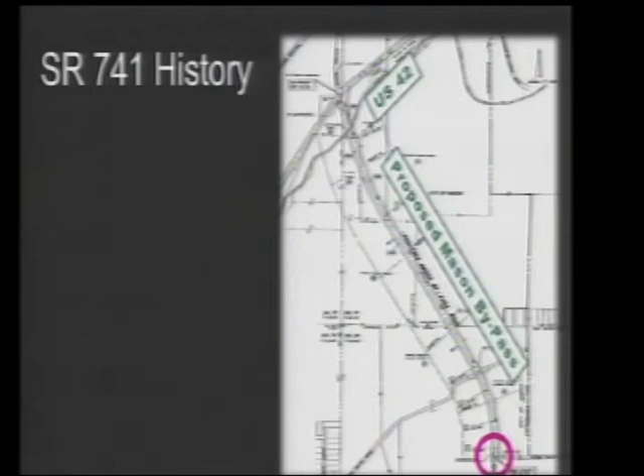So first, this area of 741 is also referred to as the Mason Bypass, which was originally built to connect 42 with Kings Mills Road. Circled in red at the bottom there is our intersection. In about 1971, Mason hit 5,000 population and became a city. In 1972, when Kings Island opened, this part of 741 hadn't even begun construction yet. So in 1973, it started. This allowed traffic from the 42 area, rather than go through downtown to get to the newly constructed I-71, to now go through the Mason Bypass and more easily get to the new highway.

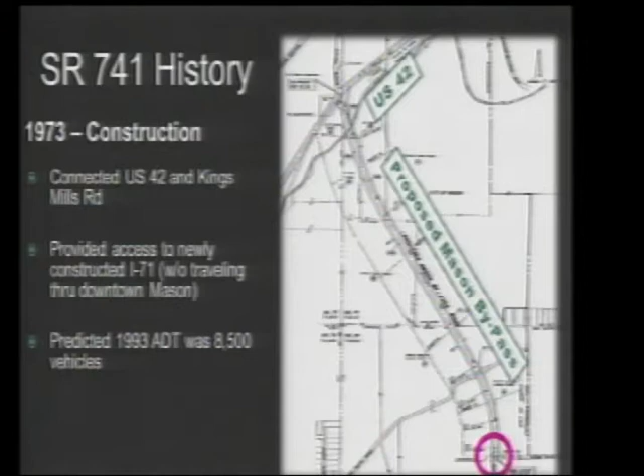I just want to mention no improvements were done in the Parkside Drive area from there to I-71. Many of you remember Kings Mills Road was just a two-lane road, really hilly, before it was widened with the next project. ODOT requires us to look out 20 years when we do projects like this. So back in 1973, the '93 projected traffic was about 8,500 vehicles, and in 1996 we were over 13,000 vehicles, so we well exceeded the projected traffic counts.

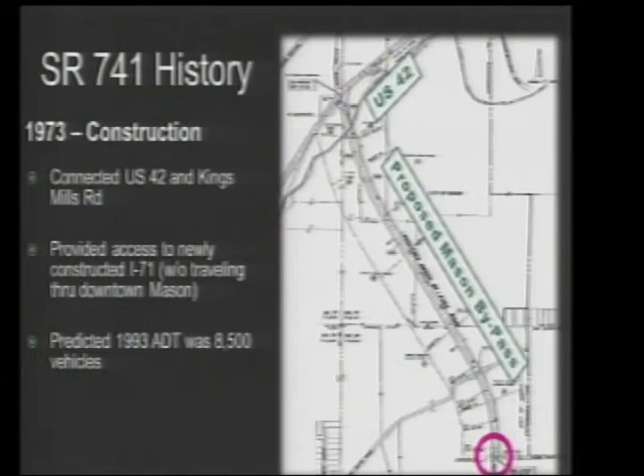The next project in this corridor, in 1997, we began construction of the widening between Parkside Drive and I-71, and again our intersection is shown there in red. With this project, we also added a traffic signal at the intersection. Prior to this, it was just a four-way stop and was also the site of a lot of backups. In this project, our 20-year projected counts for 2016 were about 18,000 vehicles, and today we're seeing counts of over 20,000 vehicles a day. So again, we're exceeding the projected traffic counts. So why is this important? The 741 corridor was really built to allow traffic to get to and from the highway from 42 and the 741 corridor north of Mason.

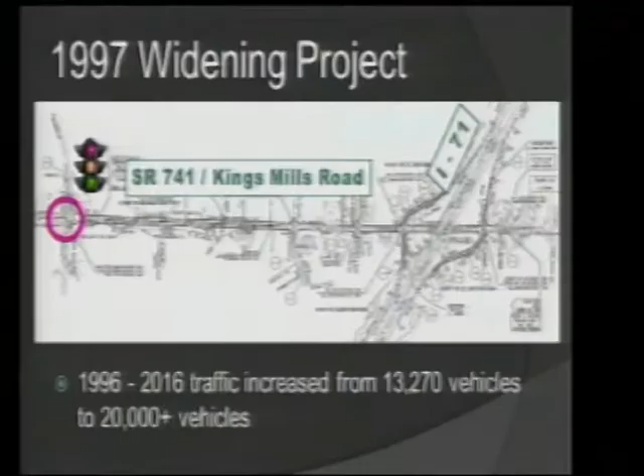So current issues at this intersection: we have backups in the southbound direction in the AM, also westbound in the PM, significant peak hour backups. We also have a lot of crashes, about 46 crashes in the last 3 years, and half of those were rear-end crashes. That is a typical crash that you would see at a congested intersection where traffic is backing up due to the signal and where the volume of traffic exceeds what the intersection can handle. We also had an uptick in crashes in 2015. We had 20 crashes alone last year. This year we've already had 15, and 11 of those were rear-end crashes, and that was just through September.

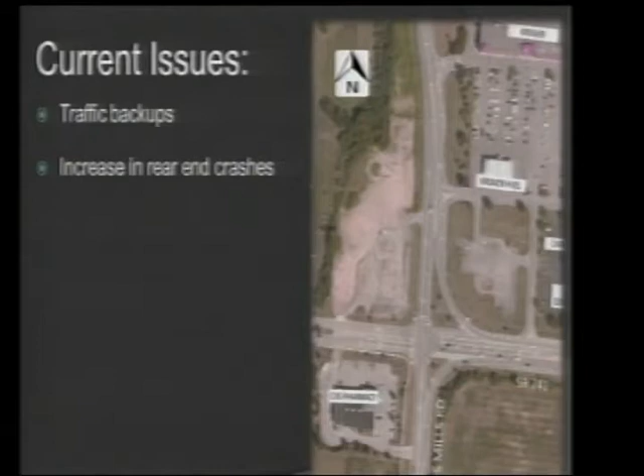We also have the Kroger Weave, and what we mean by that is traffic that's going through the intersection, either making a left turn off Parkside or going north on Kings Mills Road, has to merge with the traffic that's going through the westbound right turn movement, and the traffic that's trying to reach Kroger has to weave through that continuous line of traffic. That's what we mean when we talk about the Kroger weave on future slides.

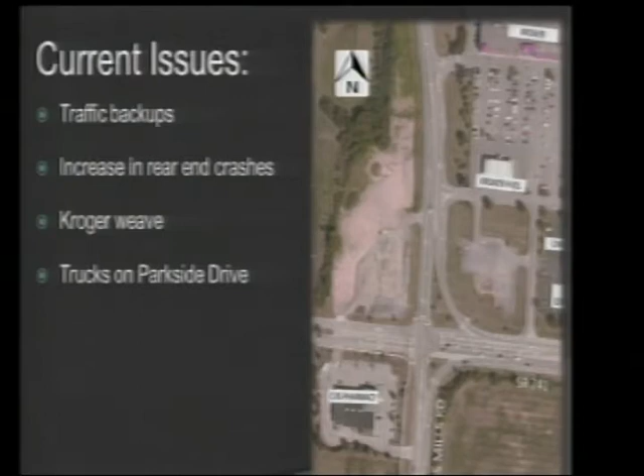We also have an issue with trucks going through Parkside Drive. We have it signed out there. We also have it on the pavement, no through trucks, because trucks think that to continue on 741, they go through the intersection rather than making that right turn, and many of them don't realize that it's a right turn to stay on 741.

So what's happening is traffic's finding alternate routes. We have more traffic using Hanover Drive, Parkside, Kings Mills Road to access the intersection because of the backups, especially in the southbound direction. We have increasing daily traffic from areas north of the city. We have the Otterbein community, the Racino, Ambleside, Carmel, which I'll go over in the next slide, as well as some area attractions. We get traffic peaks after the AM peak. We get another peak for Kings Island and the beach, as well as Great Wolf Lodge and the tennis tournament and volleyball tournaments.

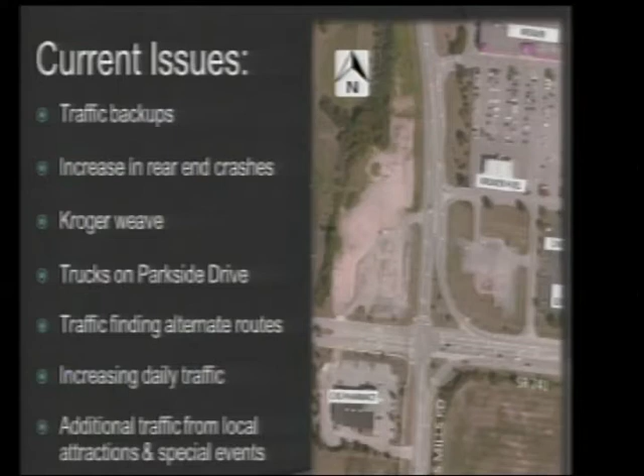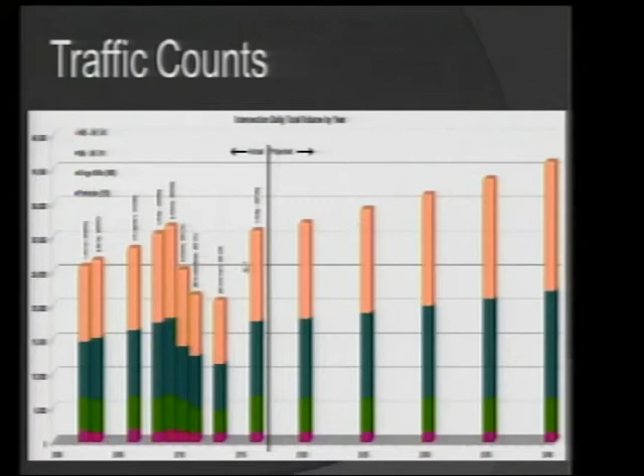So again, ODOT's requiring us to do projected counts 20 years out. We're using a 1.5% growth factor out to 2040 to get our projections that we've done all of our traffic modeling on. So as I was saying, there's potential growth to justify these numbers. We have over 500 acres of industrial and office ground within the city limits.

We also have the Ambleside development that's just beginning to build houses here. We have the Crooked Tree Preserve subdivision with 200 plus houses there. We're continuing to build out the Reserves of Carmel subdivision down here, as well as the Willowbrook subdivision. And that's just within the city of Mason.

We also have the Otterbein development, I understand, has 3,000 to 4,000 units possibly, and that's again a long-term plan, as well as the state is looking to sell about 1,000 acres of prison property for future development.

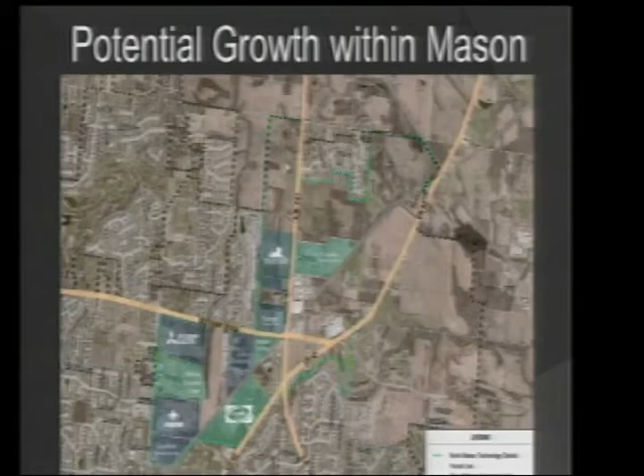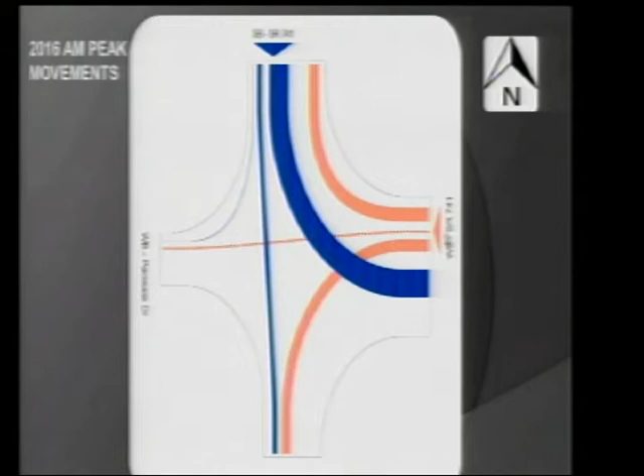If we add on to that the westbound movement of 741, you can see that it's fairly evenly distributed between the westbound right turn and westbound left turn movements. Again, this is westbound traffic approaching the intersection. If we add on the Kings Mills traffic, the majority of that traffic makes a right turn, also heading towards the highway.

And finally, Parkside Drive. So as you would expect, the major movements are 741 southbound and 741 westbound. Both the left turn and the right turn movements are really heavy. We expect the growth to occur. If you look back at the previous slide, you'll see that the Kings Mills traffic and Parkside traffic are pretty stable through all the counts that we've done.

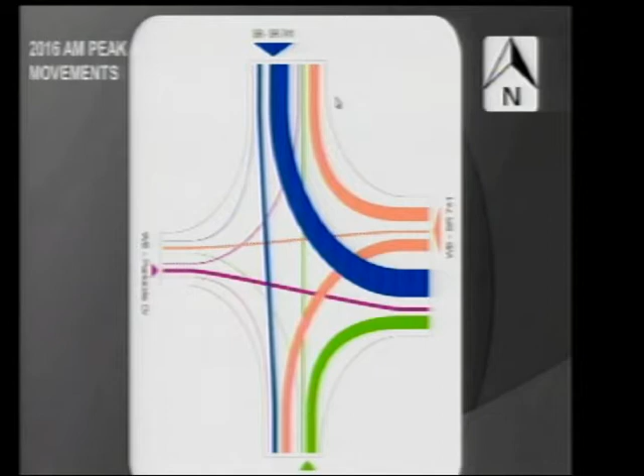What fluctuates is the 741 traffic. So this is 2016, and in 2040, we expect that traffic to grow on 741 and look something like this in the next 20 years.

So what if we don't do anything? What if we just leave the intersection as it is today? People will start to back up more on 741. Our projections are that it'll be about a 3,000-foot backup, which is almost to Stone Ridge Drive. With that, people will start finding alternate routes. They're going to start using more and more the Kings Mills Road intersection, the Mason Morrow Millgrove Road corridor. They're going to take Mason Morrow Millgrove to Columbia and take the back way to the highway.

They're also going to start cutting through the intersections. So if they're coming out of, let's say, the Carmel subdivision, they see traffic backed up, they might start to come in Stone Ridge Drive and cut through to get to Parkside to get to the highway that way.

So we've explored 3 solutions to the intersection, and the first is a dual left southbound turn lane, and I'll let Ed talk about each of these solutions, but we also had to, with this solution, add a westbound left turn lane because of that heavy movement that I showed you earlier. We looked at a roundabout. It required a 2-lane roundabout because of both today's traffic and the future traffic.

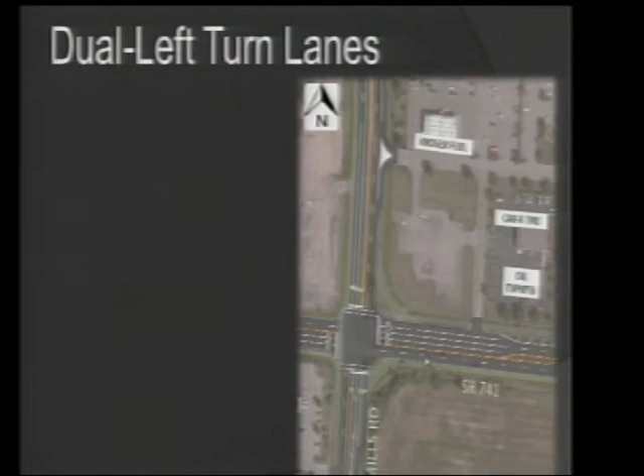Similarly, for the southbound traffic, everyone knows that this right-hand lane is the lane you need to be in to go to southbound 71. So a lot of people will be in that lane knowing that they want to eventually get onto southbound 71. So this is a temporary solution only, because we are seeing failing levels of service by 2040. As I mentioned, it requires 2 southbound and 2 westbound left turn lanes.

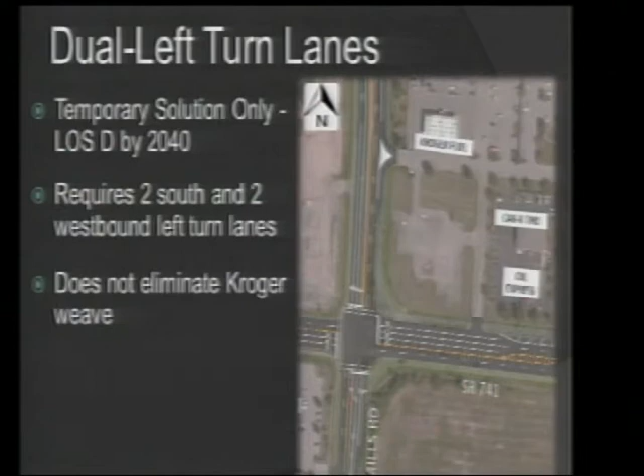It does not eliminate the weave at Kroger. Obviously, there's the weave issue up north here, but this also creates an issue where you want to go northbound on Kings Mills, and this person is turning right from westbound, and the weave issue happens getting into either one of the Kroger access points.

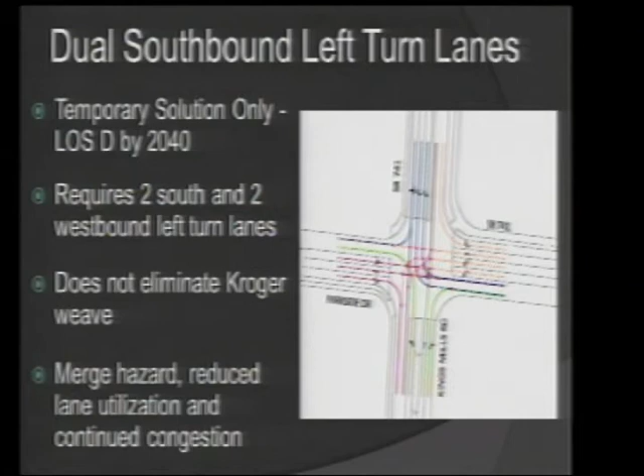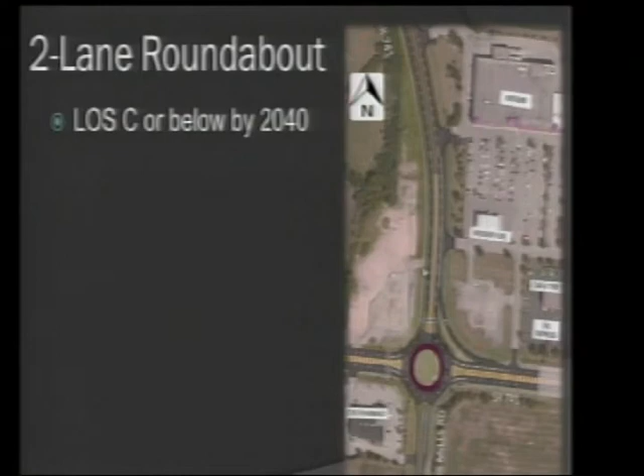So a second option that we looked at was a 2-lane roundabout. This has a level of service C or below by 2040. We are still seeing queuing issues. For instance, in the southbound direction, we're still seeing about a 1,100-foot queue, and I'll explain about the lane utilization a little bit, but we do still see a large queue for the southbound traffic.

There are 2 circular lanes needed, so this is a large roundabout. It's somewhat complicated, and we do have to accommodate truck traffic because there is a lot of truck traffic going through this intersection, coming to and from the locations to the north.

One of the things about roundabouts that make them great is they do like to have even distribution. So in locations where we have even traffic distribution, the roundabouts tend to work really, really well. This is a location where you have a lot of traffic going westbound, a lot of traffic going southbound, not as much traffic eastbound and northbound, so the distribution is not there.

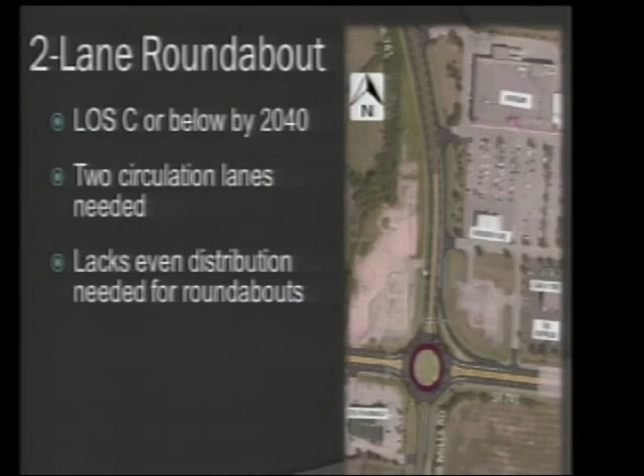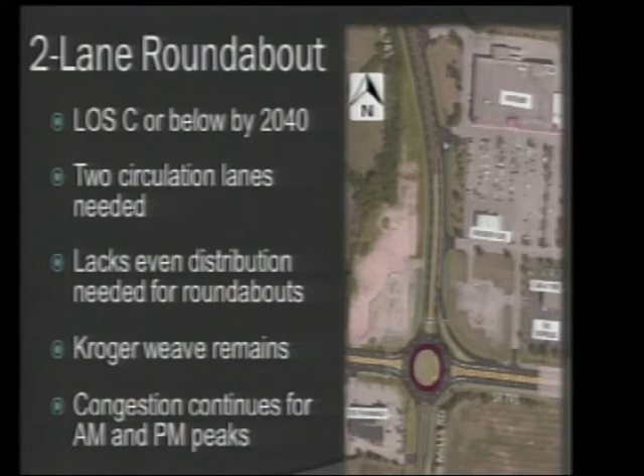The Kroger weave remains, and in some cases, because of the free flow condition, could be slightly worse with a roundabout than what it would be with some of the other options. And finally, the congestion continues for the AM and the PM peaks. I'll show you the conflict point diagram. Again, the red dots mean the places where conflicts could happen.

With the level of traffic traveling southbound as well as westbound that want to turn left, we would need to accommodate dual lefts. And what that means is that you can see right here, you would have to exit the center lane in order to go southbound as well as the outside lane. So that does create some issues there, as well as coming southbound and then traveling eastbound on 741. You can see both lanes exit, and that does create additional conflict points, and it makes it more of a complicated roundabout.

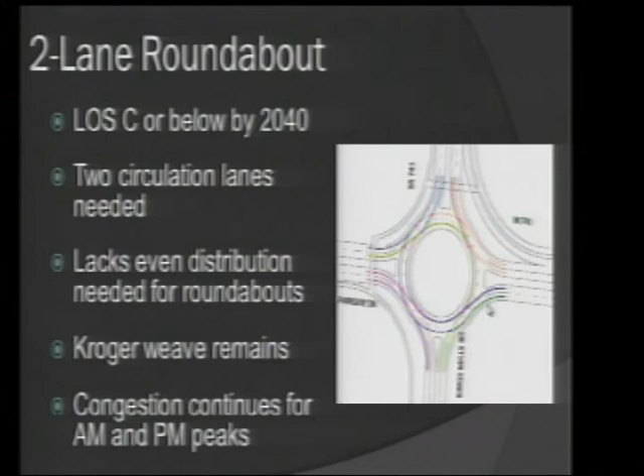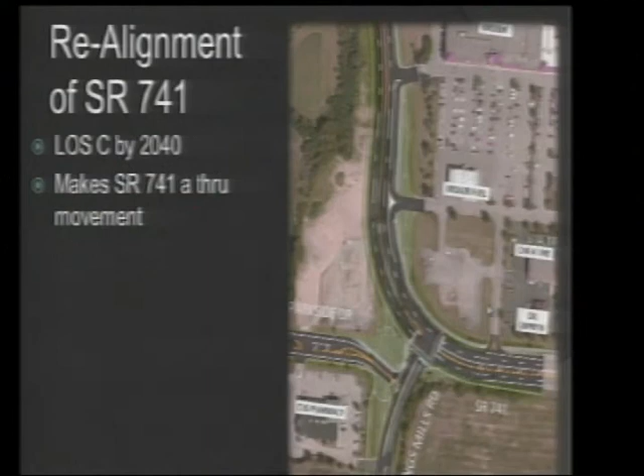Finally is the realignment of 741. This option does provide a level of service C by 2040. It makes 741 a through movement. Right now, the 2 major movements through this intersection are southbound left and the westbound right. So this design does accommodate that by making those a through movement at the intersection, allowing the intersection to work much more efficiently. It improves the safety with fewer left turn movements, and we'll see the conflict diagram in a second. It does eliminate the Kroger weave.

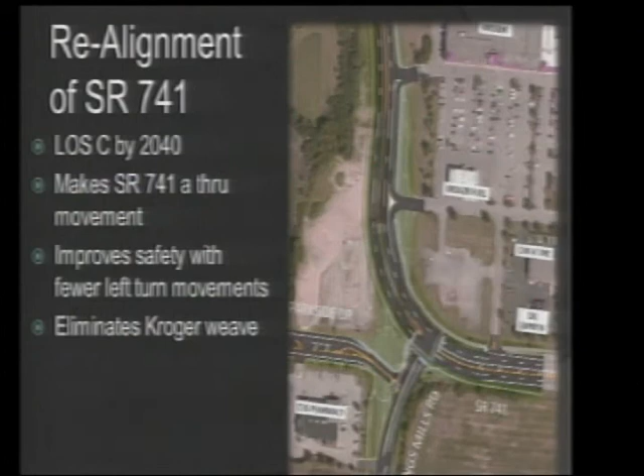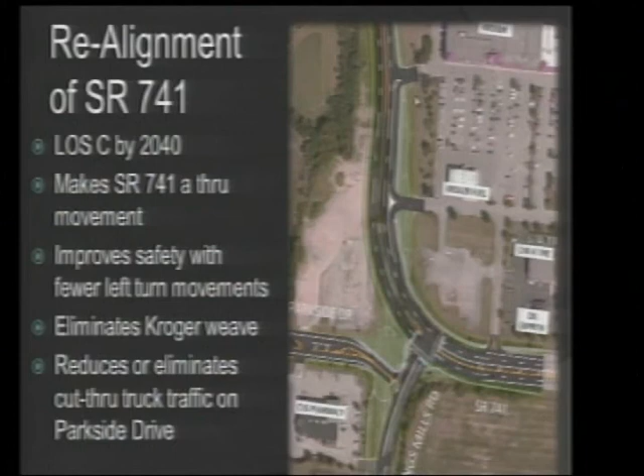We don't have the people on Kings Mills trying to go through the intersection at the same time as the right turn overlap, the right turn slip ramp that we get for westbound traffic, and so that makes it a little bit safer, especially for the Kroger entrances. And it reduces or eliminates the potential for the cut-through truck traffic on Parkside. The truck traffic does not try to drive straight through the intersection and end up on Parkside as a result.

So you can see here the conflict point diagram, we're down to 8 conflict points because of the reduction in turning movements at the intersection. The one thing this does is, given the change of the intersection, the operation of Parkside will need to change. So we've proposed a tie-in at Kings Mills. We are reviewing the movements in and out of this. This is not by any means the final option for this. However, it is going to have to change.

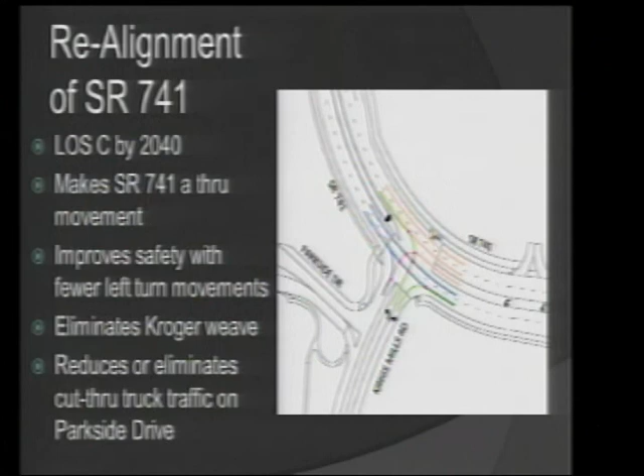One of the things that we will be changing this winter is, given the current backups that we're seeing for the traffic, we are going to be changing the phasing of the traffic signal to allow it to rest on green for southbound through and left. And what that means is that there will be slightly more delay for Parkside, and that's going to continue to get worse as the traffic on 741 increases.

So that change will be coming with some additional equipment that we'll be installing at Parkside. That'll be coming this winter. So just when that does happen, just be aware that that's because of changes that we're making at the signal. Parkside won't rest in green for them anymore. It'll rest in green for the southbound through and left. So with that, I'll turn it back to Kurt to finish up.

Thanks, Ed. So next steps. We have already applied for grant funding towards 2020 construction. We've been awarded that. So we are continuing on a preliminary design and establishing where the right-of-way might be needed for the project. The right-of-way limits will determine how much environmental work we need to do, and also lead us to our public involvement meeting that we're required to have likely next fall.

So that'll happen, and you would all be notified regarding that meeting. We'll notify properties that are impacted by the project specifically, so that they can come out and voice any concerns with the preliminary design of the project. We'll also review, as Ed said, project alignment, so maybe changes in the alignment for the Parkside connection.